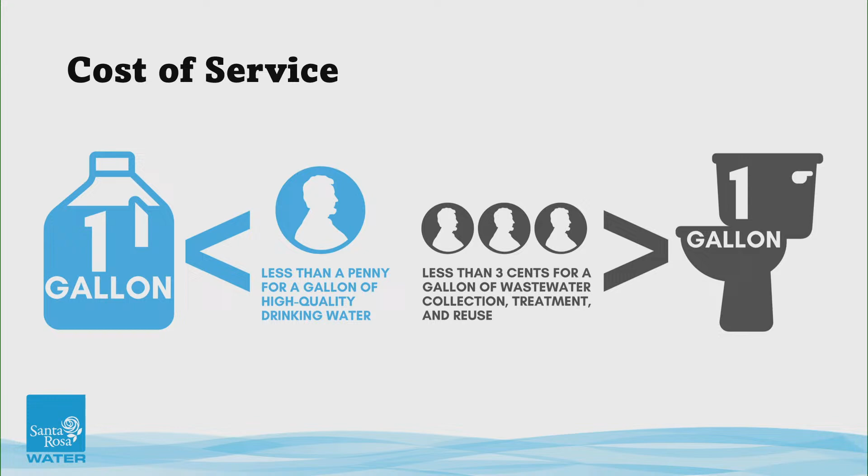So in an effort to highlight the services that Santa Rosa Water provides to the community on a daily basis, our team relaunched our Value of Water campaign in May to share stories about our water system, to introduce the community to the people behind the pipe, and to highlight our ongoing investments in key infrastructure that are necessary to secure a reliable water future. About 90% of our water infrastructure is underground, so by sharing this information with our community, the goal is that they'll have a better understanding of the magnitude of the essential infrastructure that connects our entire city, all 54,000 customers, to water and sewer service.

This is a mostly digital campaign, leveraging our website, srcity.org/thevalueofwater, our City Connections e-newsletter that goes out weekly, and our social media accounts to share these stories. I'm going to share a couple of examples of the posts that we've shared online as part of this campaign. We're using the tagline 'always on,' meaning rain or shine, our team is always on, so your water is there when you need it.

On the right, we have an image of our local water operations team out in the field making a repair to our water system.

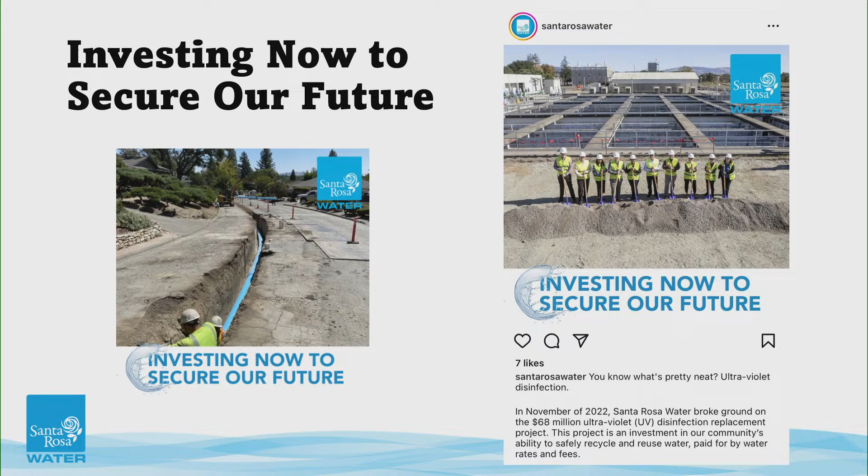We're also using the tagline 'Investing Now to Secure Our Water Future.' We're highlighting the strategic investments that we're making to improve the reliability of this critical water infrastructure. On the right, you'll see an image from our groundbreaking ceremony of our $68 million UV disinfection replacement project. This is a key component at our Laguna treatment plant, and on the left showing a replacement of water pipe in a neighborhood.

So to view more of this campaign, I encourage you to follow us on Facebook and Instagram, and I've also prepared a social media toolkit for the board that I'll share after this meeting.

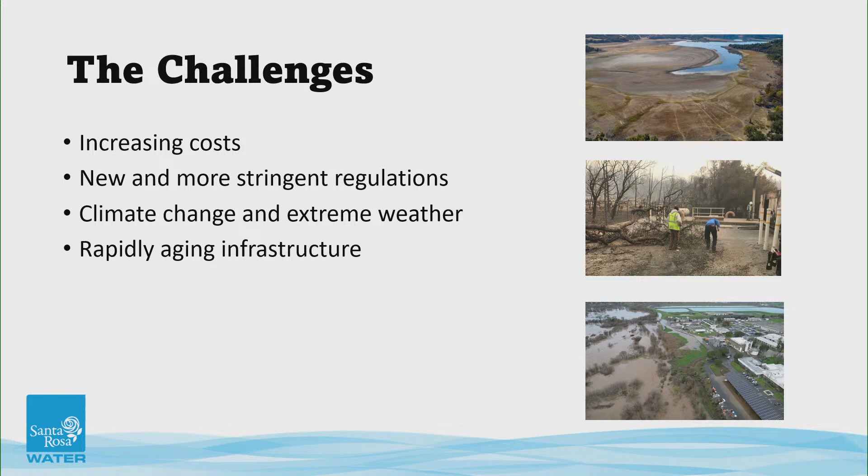So why is this campaign so important? Our health, the economy, and the environment all rely on reliable water service. And Santa Rosa Water is committed to provide quality water and sewer services, but we're facing some challenges related to increasing costs, new and more stringent regulations, climate change and extreme weather, floods, fires, droughts, and rapidly aging infrastructure. So to address these challenges, we need to make some fiscally responsible investments in our water systems.

Like much of the infrastructure across the state and the nation, our water system is rapidly aging. Many parts of Santa Rosa's water and sewer system, including the regional Laguna wastewater treatment plant, are well over 50 years old. Based on Santa Rosa Water's latest infrastructure report card, prepared by the city's asset management team, our water, sewer, and regional water reuse systems need some significant capital investments to ensure the reliability and resiliency.

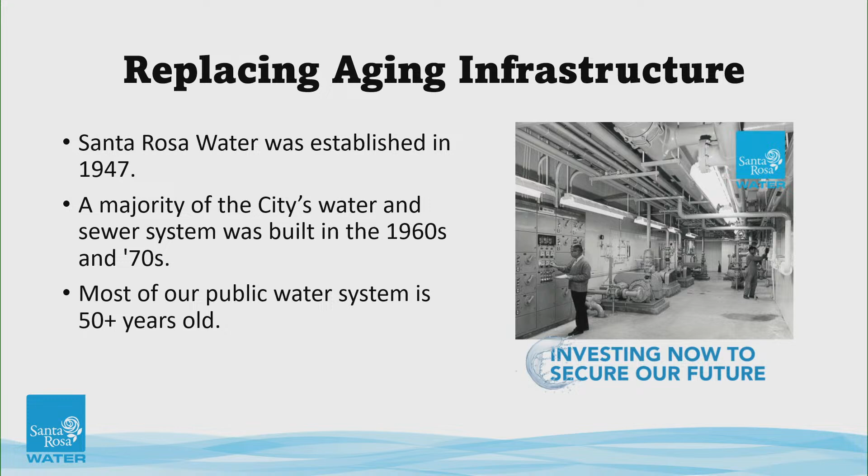Seismic retrofits of our water tanks, the rehabilitation of groundwater wells, and pump station upgrades. For our sewer collection system, it received a C+, meaning it requires attention, and an additional annual investment of $29 million is needed to address priority projects including sewer main replacements, rehabilitation of large sewer trunk lines, and lift station upgrades. The regional water reuse system received a D+

and that includes the Laguna treatment plant. That means it's at risk, and it needs at least an additional $15 million per year for the modernization of that infrastructure. Priority projects include replacement of most of the major components of that treatment plant, including a $35 million upgrade to the electrical infrastructure at the plant.

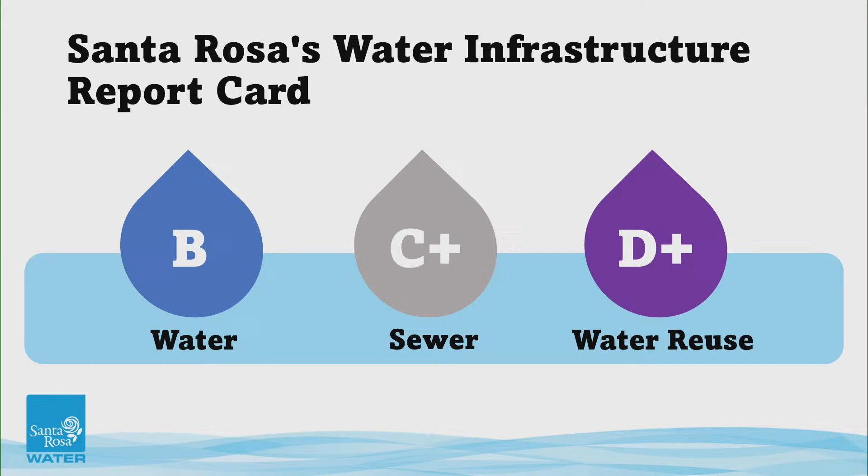So to ease the financial burden on our customers, the city is working closely with our state and federal partners. For example, Santa Rosa received a $19.1 million WRDA authorization and is working to get funding appropriated for a critical sewer trunk lining project. This project is estimated to cost $77 million and would replace 9 miles of deteriorating sewer trunk line that connects the region to the Laguna wastewater treatment plant.

If this trunk line were to fail, it would have catastrophic impacts on our community and the environment, but additional local investments are also needed in order to prevent breaks and service disruptions, ensure water quality, improve seismic safety, enhance our climate resiliency, protect our watershed, improve water supply reliability, and harden our infrastructure against the threat of wildfires and floods.

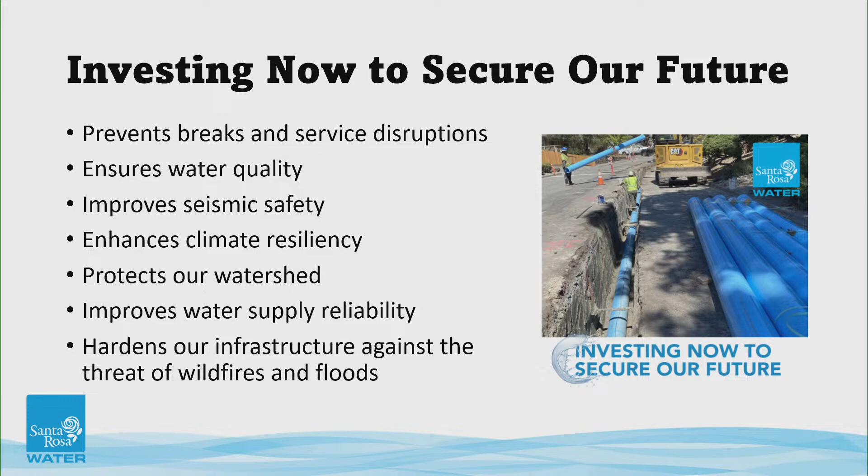So most of our public water system's operation and maintenance and investments in our infrastructure are paid for by water and sewer rates. And every few years, Santa Rosa Water undergoes water and sewer rate studies to ensure what customers are charged reflects the true cost of providing those water and sewer services.

So Santa Rosa Water has contracted with an independent rate consultant to complete a cost of service study and propose water and sewer rates for 2025 through 2029. We do not know what those proposed rates are yet, but they would take effect on July 1, from 2025 through 2029, if approved.

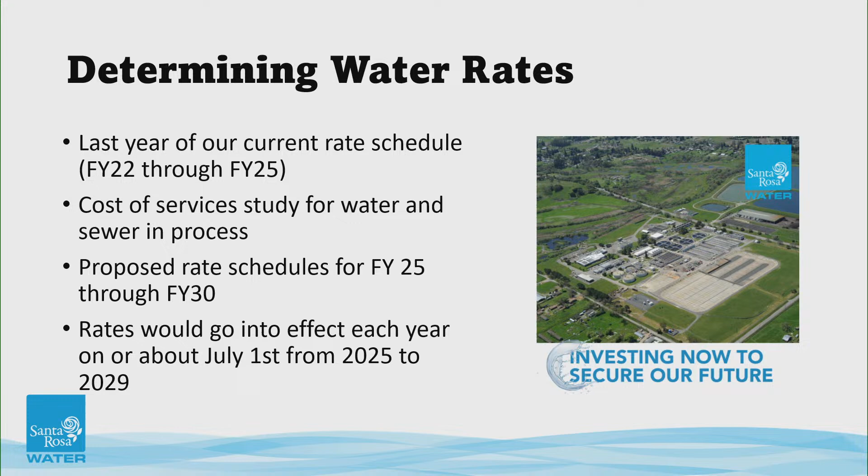So here is an overview of the process that we'll be taking for rate setting. The rate consultant is currently working on our water and sewer rate studies and working with an internal water rate task force made up of city staff on the data analysis.

Initial information will be brought to the Board of Public Utilities Budget Subcommittee, and staff will work with the subcommittee to develop a rate recommendation. Staff will present the recommendation from the Budget Subcommittee to the full board in a study session, and then additional meetings will occur until the board has approved a rate recommendation for City Council.

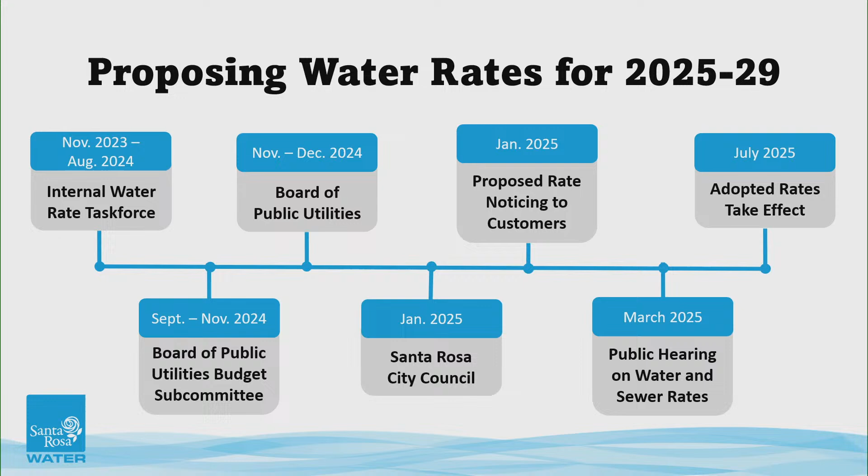So staff will present the board's recommendation to City Council in a study session, and based on Council's direction, a public hearing will be scheduled for the adoption of the proposed water and sewer rates. Before the public hearing, customers will receive a Prop 218 notice in the mail with those proposed rates, and if adopted, the new rate schedule would take effect on or about July 1, 2025.

So to keep our customers informed through the process, Santa Rosa Water will provide timely updates via our website, srcity.org/waterrates, through our City Connection e-newsletter that goes out to over 100,000 subscribers, utilizing our water bills, social media, traditional advertising, as well as public meetings and community events.

As part of our outreach to customers, we'll also share all the ways that we're able to help our customers manage their water bills. We have a customer service team that's available to answer questions and connect customers to resources. We have our Water Smart portal, which provides near real-time water usage data so customers can understand how and when they're using water. We also have our Water Smart programs.

We offer free devices like high-efficiency shower heads and aerators. We have in-person Water Smart checkups where our team will provide customized water-saving recommendations for homes and businesses, as well as a variety of rebates to help our customers save water. And we have our Help to Others Water Bill Assistance Program. This program offers a discount on a water bill for income qualifying customers.

So to learn more about the value of water and the rate setting process, I encourage you to visit srcity.org/thevalueofwater. And with that, I'm happy to answer any questions.

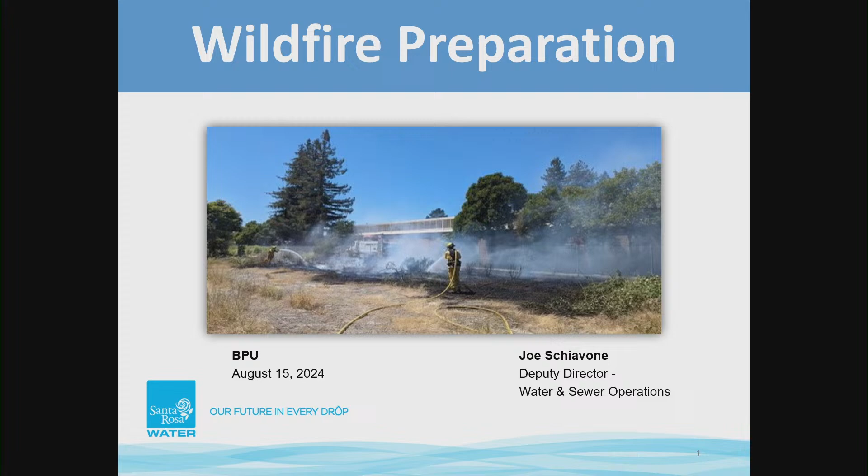The 2024 fire season was officially declared as of June 10th for the city of Santa Rosa. This past year we saw above average rainfall, which resulted in increased vegetation. Some of the good news in some ways for us, but also some concerns, looking at the number of acres burned compared to last year in California.

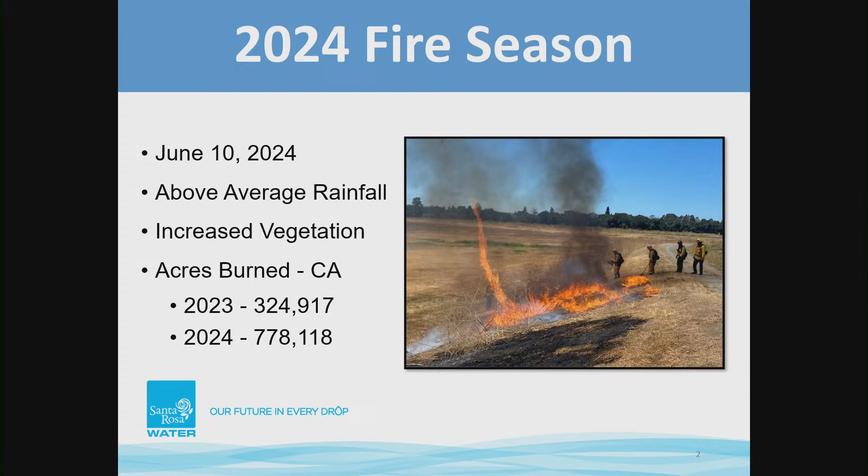In 2023, around 325,000 acres burned. By early August of 2024, we were already at over 778,000 acres burned.

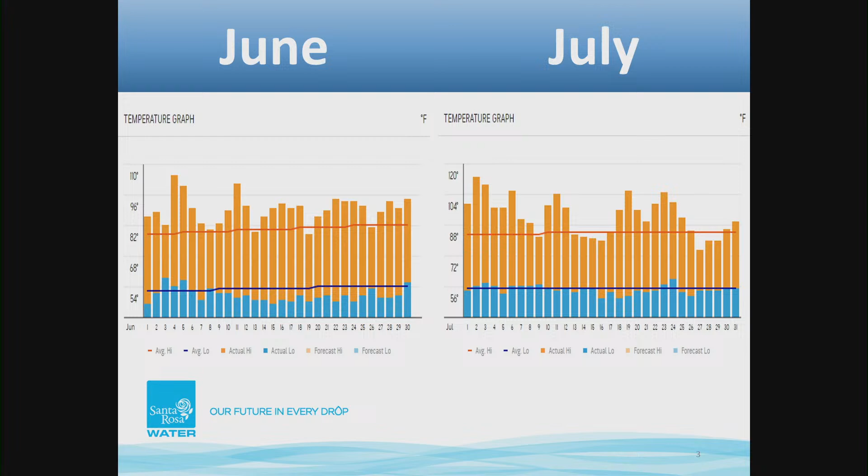That increased vegetation, along with several days throughout June and July of above average temperatures, accompanied by warm winds throughout our region and the state, led to early fires in June. These were mainly grass fires. Those fires continued through July, where the warm weather and wind continued, drying out some of the heavier fuels in our area right as we enter the peak of fire season.

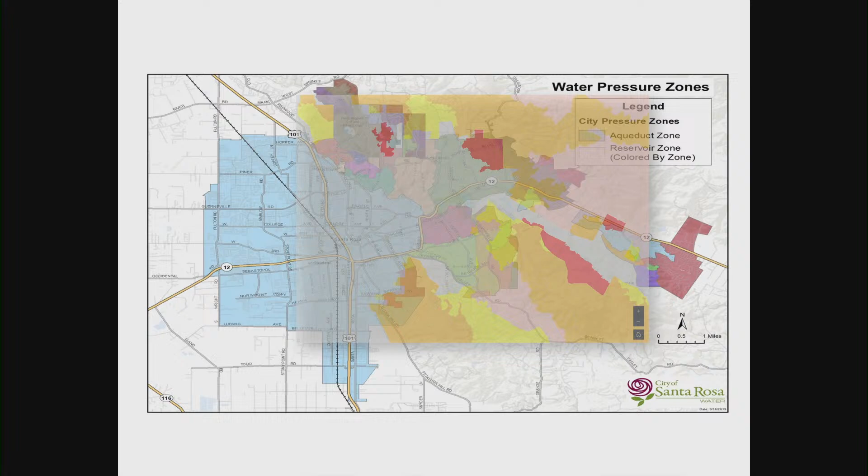To highlight some of our concerns: damaged infrastructure, similar to what we saw in the 2017 fire, and denied access can be a big problem for us in these emergency situations. We've worked closely with our partners at Santa Rosa Fire to develop techniques to get our operators in early and safely, as soon as it's safely possible, with a lot of communication back and forth to make sure our folks are in a safe position while working in that area.

We do experience communication interruptions, both from lack of power and from some of the infrastructure being damaged on the lines that run between our water pump stations and our tanks.

On the interrupted power supply side, we know that PG&E will cut power for safety reasons if there is a large fire in our area. It could be outside of our service area, but it could still result in a loss of power. They will also often cut the natural gas service to these locations as well.

PSPS, or public safety power shutoffs - we've been fortunate the last couple of years to not see many of these. We used this as an opportunity to develop several planning tools for long-term power outages in our area. We implement those tools when we see a fire in our area, because we were seeing several days without power when these events were happening regularly. Fortunately, PG&E has made many upgrades to their system, and we see the number of those diminishing.

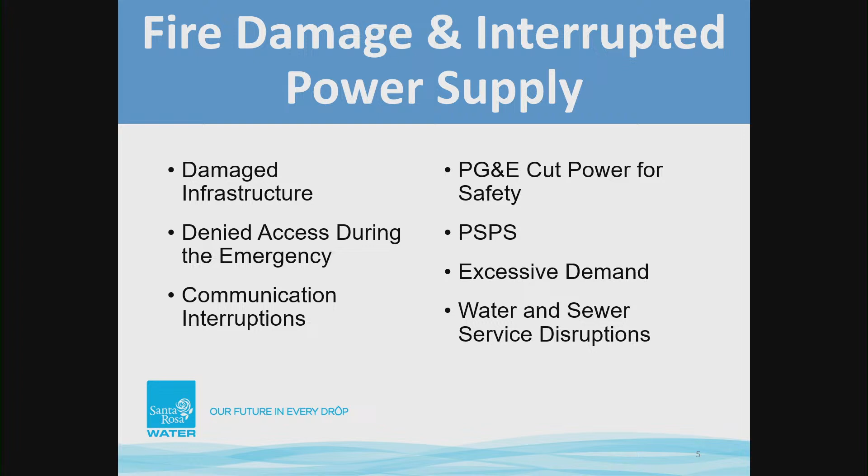The warm weather we're experiencing also has an impact on excessive demand, in which case PG&E will shut down portions of their grid, and this can have a big impact on our water and sewer pump and lift stations. All of these items are a concern for water and sewer service disruption, and we do our best to prepare and plan ways to mitigate those concerns.

A lot of that preparation starts with the training of our staff. We have a lot of new staff on our local team, and we are helping them understand what it means to be disaster service workers for the city of Santa Rosa.

Their schedule and shifts can change quickly when we go into an emergency operation. We've worked closely with our safety and training coordinators to develop effective drills to make sure our folks know how to operate safely and how to communicate and document all of the work they're doing while we are in an emergency operation. We continue to develop and refine procedures to make us more efficient, increase safety, and improve resiliency.

Items such as our refueling procedures allow for multiple layers of refueling should we have an issue getting fuel to our area. We also stockpile supplies.

This is in the form of a lot of PPE, or personal protective equipment, along with things like batteries, additional radios, and things that our folks might need in the field, including the supply cabinets that we have in some of our remote facilities.

Our ongoing efforts include infrastructure improvements, mainly focused on the hardening of our stations. We saw a lot of this after the 2017 fires, including things like metal or steel roofs and concrete walls. We've also taken the opportunity, as stations were rebuilt, to move some of the key components underground to protect them from any fire that might come through in the future.

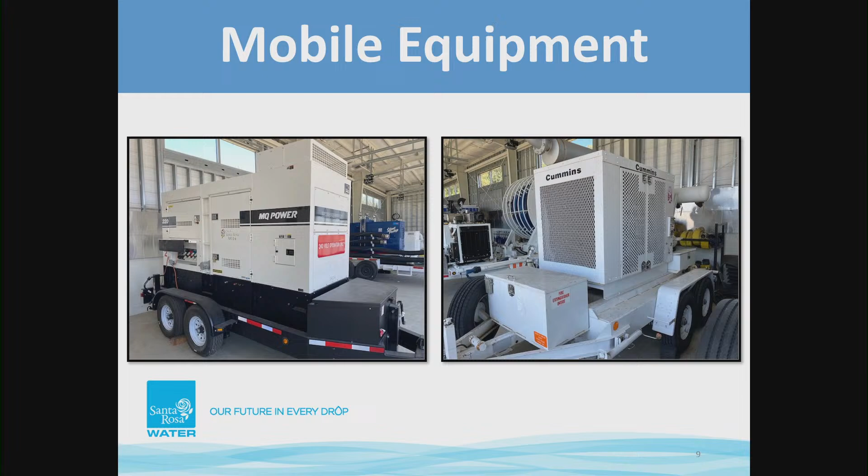And then just to touch quickly on some of the capital improvement projects that I have mentioned in the past, and I'm sure you've heard quite a bit about the controller, PLC, and radio upgrade project. This is a great project for us. All new controllers at our water pump stations and all new radios for our SCADA system. This project is nearing completion. We have all the controllers installed as well as all the radios.

What we're doing now is there are several features on the new controllers and on the new radios that allow enhancements to our system. So there is some additional software and hardware upgrades, but they're providing us with additional data and better ways and more efficient ways to operate our system.

The fiber optic communication piece has been an ongoing effort for years for Santa Rosa Water, especially on the local side. This connects hard lines between stations and tanks. We lease some of these lines and are currently transitioning to city-owned infrastructure. We also put additional conduit in to allow for the opportunity to provide power to any tank that's not adjacent to a station and doesn't have a generator.

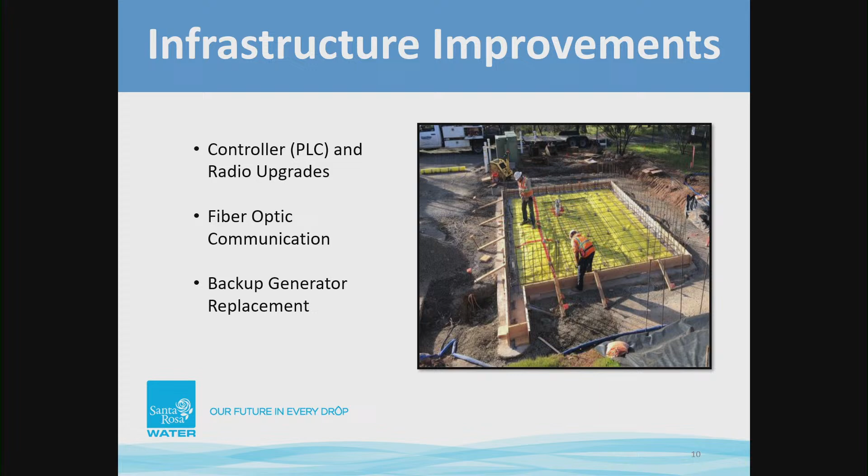A project we're very proud of that's coming close to an end now is the backup generator replacement project. I believe we have 3 stations left to install generators; the rest have all had their generators installed. That's 18 locations total, and most of those have been tested and are fully functional. This is a large project for us, standardizing 18 generators. It received about $7.9 million in hazard mitigation funding to help us with that project, and we hope for completion in the next few months, hopefully by the end of this year.

And I would be happy to answer any questions you may have, sorry.

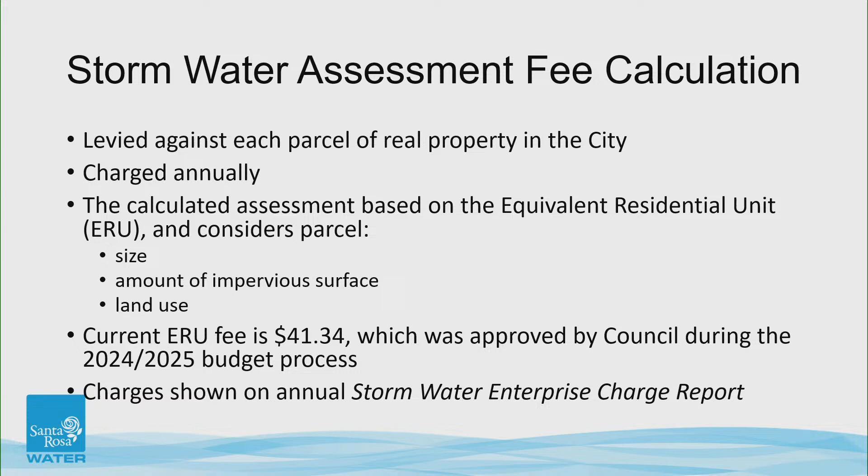Every year, Santa Rosa City Council holds a public hearing to: 1, adopt the Stormwater Enterprise Charge Report that shows the amount of the fee for each parcel; 2, approve placing the charges on the county property tax roll for collection; and 3, allow the public the opportunity to protest the method of collecting the charges. The public cannot protest the fee amount that was approved during the budget process in June. Property owners may protest the placement of the Stormwater Enterprise charges on the Sonoma County tax roll by either speaking at the public hearing or submitting a written protest. If the council finds that a protest is made by a majority of the parcel owners listed in the report, it will not be adopted and the charges will be collected separately from the tax roll.

The public hearing on the Stormwater Enterprise collection is scheduled next week on August 20th at City Council. Notices for the public hearing were published in the Press Democrat on August 5th and August 12th. And again, a hard copy of the Stormwater Enterprise Charge Report is available for review online and at the city manager's office.

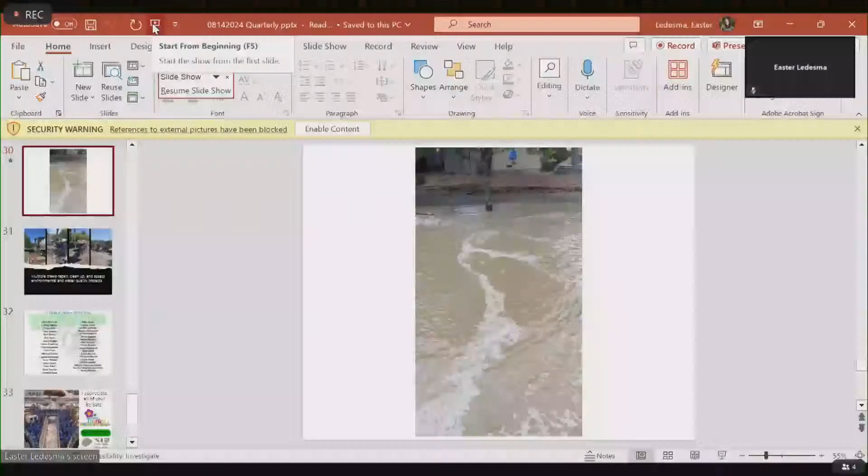Second, I wanted to give an update on the Carissa Way main break, and I'm actually going to do a little show and tell, hopefully, if I can. As the board may be aware, I provided you with some information that on Friday, August 9th at 7:50 in the morning, we had a 16-inch PVC water main break on Carissa Way. There's a video that I'm hoping we can show.

Oh, we can't hear the volume. That's okay if the volume doesn't work. This gives you a sense of the amount of water, and what it looked like when our staff arrived out on scene.

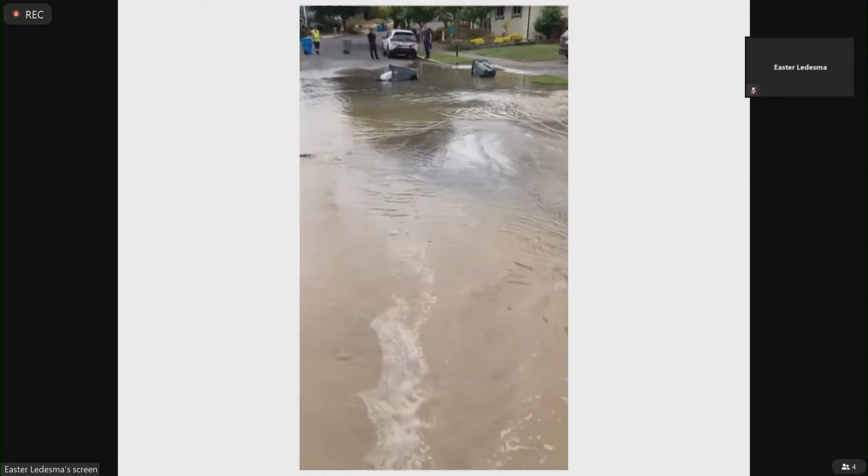At about 7:50 in the morning, our senior water tech was monitoring SCADA and saw alarms coming from our water pump station 9 indicating low pressure. At the same time, it was noticed that 2 pumps were on pumping water at a time that is highly unusual. Seeing that this was unusual, a supervisor was immediately notified and recognized that this was indication of a main break.

These actions were taken shortly before we started to receive customer calls reporting a large leak on Carissa Way. Water crews were dispatched and arrived shortly to isolate the damaged main from the water distribution system, and the damaged main was completely isolated by 8:38 a.m., which is really an amazing response time. The damaged water main was completely isolated by 8:38 a.m.

We lost almost 1 million gallons due to the water main break. This 16-inch water main is the primary transmission line between Water Pump Station 9 and our 2 water tanks that feed the majority of the Bennett Valley area. However, due to the loop-fed system, water was still able to be pumped from the station to the storage tanks and supply all of our customers while repairs were being made. So while we did have a temporary disruption and low pressure to the zone, customers were pretty much in water the whole time, even during the repair.

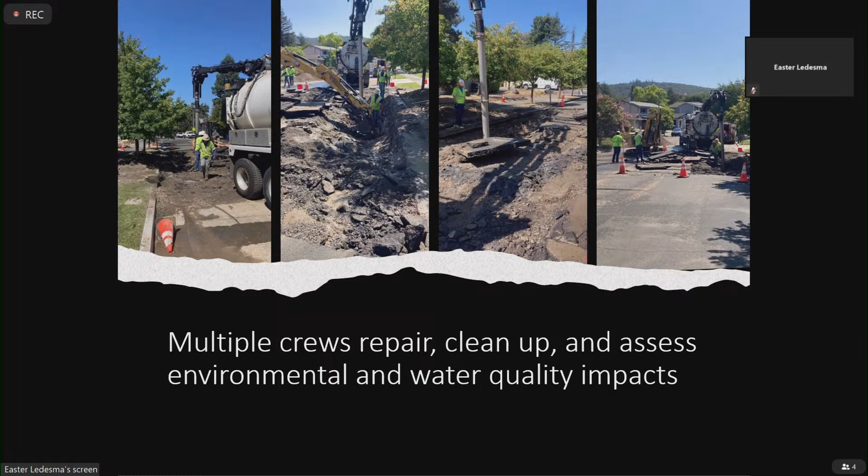Some of our customers did have a complete disruption of water service, and those in the water zone at higher elevations did receive a boil water notice. We consulted with the State Water Resources Control Board and determined the best way to identify affected customers, and got direction from them on how to notify those customers. Water employees hand-delivered the boil water notice to the affected customers that Friday, and once the water samples came back saying the water was safe for consumption on Sunday, August 11th, water crews again were out notifying customers that the boil water notice was rescinded.

I will note that this was a very unusual break in how it occurred, and the response we had to do in relation to the Division of Drinking Water and State Water Resources Control Board. So we are doing an after-action report and lessons learned on how best we can get communication out a little bit more quickly. That said, this response was amazing.

I just want to take a moment to appreciate that 35 staff were needed to come in some fashion, or be in, or come in over the weekend to lead this effort. I cannot be more proud. I cannot say enough about this team of folks that were able to keep our community in water with very little disruption. This was a huge main break.